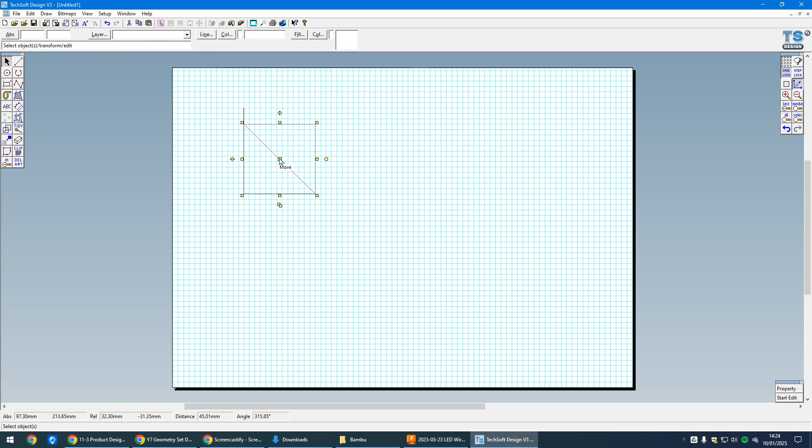You could start a new one, or continue working on the CAD file you used to make the ruler. I'm not going to use the line tool to draw this shape, because if I do a series of lines, they're classified as separate lines. That means I could move them all apart and separate them, which could be useful, but in our case I don't think it is.

Instead, I'm going to come to Tool B3, here in the top left of the screen. I'll hold the mouse button down and go to the fourth tool along, which is called the Open Polyline.

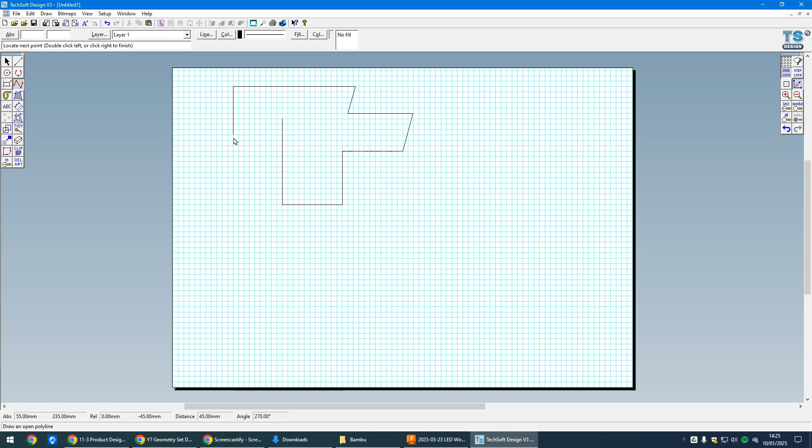What this allows me to do is simply draw a series of lines by left clicking, and then right click to finish. Okay, let's undo that—I don't want that.

There's something interesting happening here: as I'm drawing lines, you can see it's kind of snapping to various points on the grid, but not necessarily following the grid itself. That's because I've turned on a radial lock.

Now, if I turn the radial lock off for a second and draw some more lines, you'll see I can literally position exactly on the grid where I want those lines to be. But because I'm making this isosceles triangle, it might be useful to work with the radial lock on.

I'm going to right click on the radial lock tool up in the top right corner, Tool D3, and set the step angle to 45 degrees. I'll turn on 'only active on line drawing and marquee box rotation,' which is super important so it doesn't get in the way when doing other general things. So definitely turn that box on.

Now that means as I draw a line, it's going to snap to vertical, 45 degrees, or horizontal. That's going to make drawing my isosceles triangle that bit much easier.

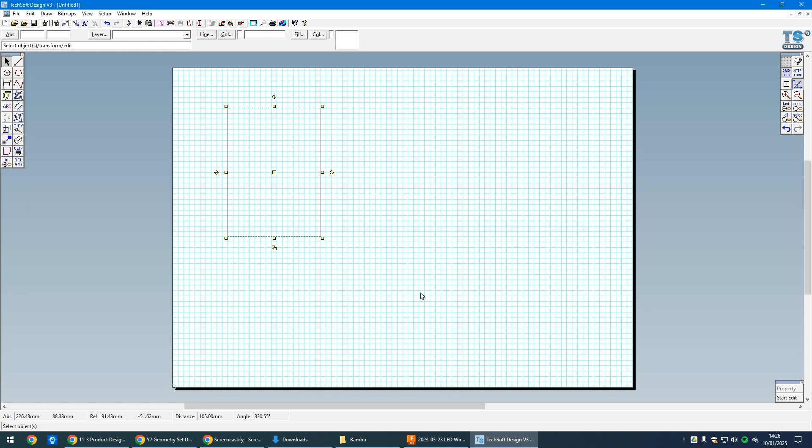Okay, I'm going to get the selection tool, put a bounding box over all these lines, and press the delete key on the keyboard. Okay, there you go—let's start to draw my set square now.

So remember, it wants to be 90 by 90. Okay, with my polyline tool, I'm going to click near the top, and now I'm going to come down 90 millimeters.

Now, as I did with my ruler, I'm going to look down here at the relative grid reference point, at the y value, which is to the right hand side of this rectangle. I want to see -90, and now I can see it says -90 in the relative grid reference in the y-axis.

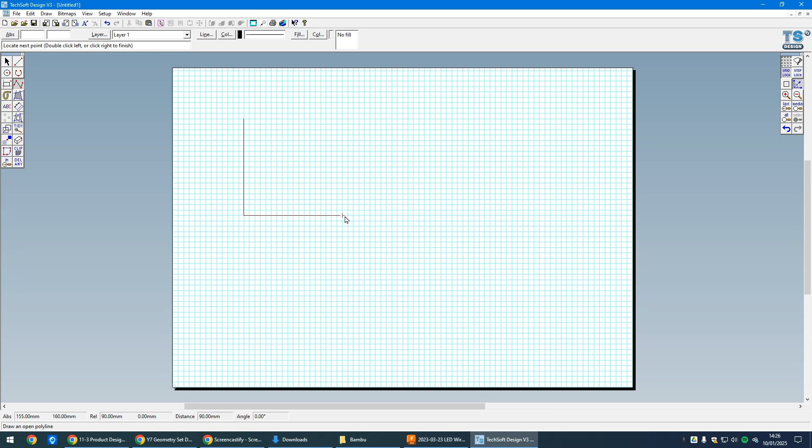I'm going to click, and then come to the right, and my x-axis wants to say 90 millimeters. Then I'm going to come back up to the left.

Because I've got radial lock turned on, look, it naturally gives me a 45-degree angle there, and then I click at the start of that isosceles triangle. Now I'm still drawing, so don't forget I've got to right click to finish that process. Let's make sure this is all working correctly.

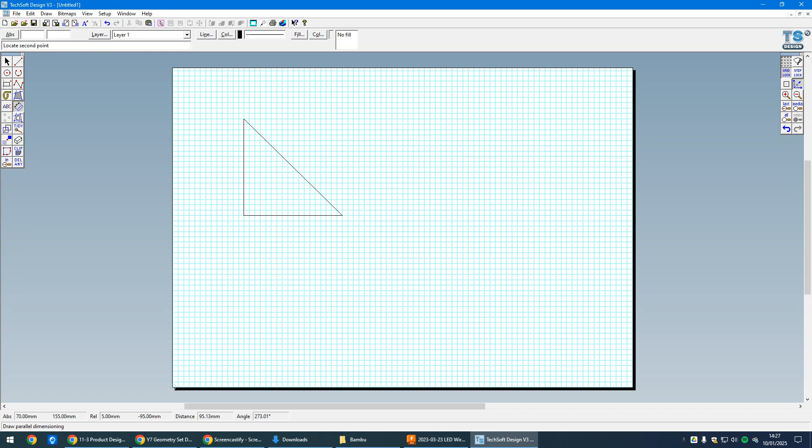I'm going to come down now to the dimension line tool in the top left, tool B5. I'll click at the top, click at the bottom here, and then click out to the side. I can see that's 90. Okay, let's click again for the bottom dimension. And then I'm also going to look here at the hypotenuse.

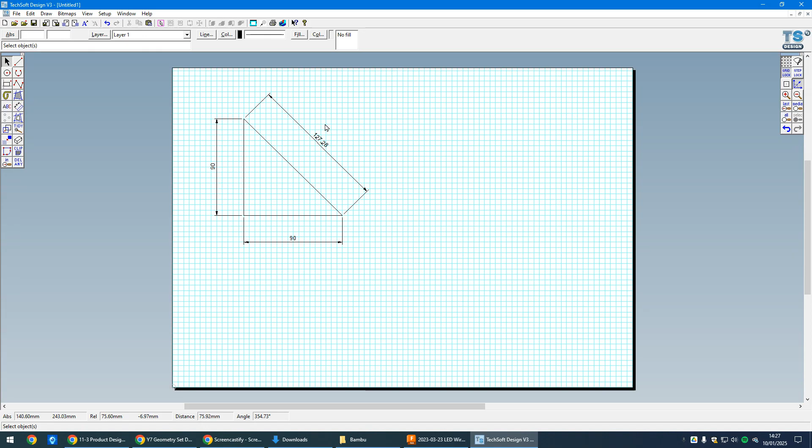Now, I don't really want to measure this hypotenuse, but it's going to be just fun to see what's happening. And I get this strange value here, 127.28. Where is this coming from? Well, you may know that there are rules for calculating the length of a hypotenuse with isosceles triangles, and this is the formula, or this is the symbol we're looking for: the square root of 2 multiplied by the length of one of the sides.

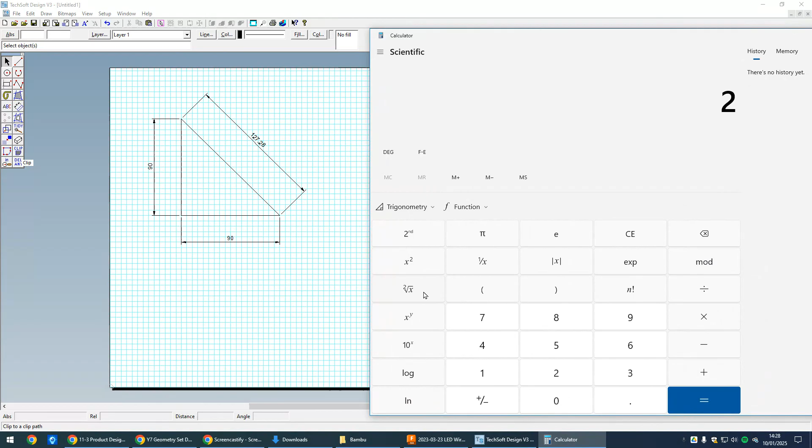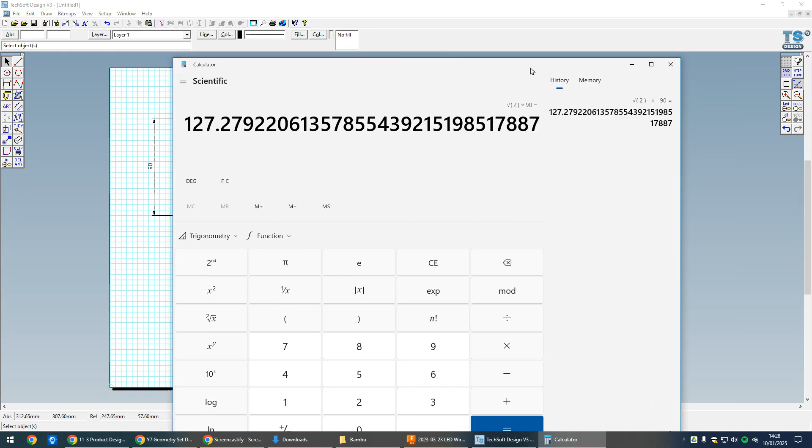So let's just bring up the calculator here and see what we can do with that. I know that I've got 2, I want the square root of 2, 1.414, and I'm going to multiply that by 90. And that gives me 127.28, because I round up here, 0.28 millimeters, and that's the dimension we have here. So that's the hypotenuse. Now, I'm not going to worry about that distance because I'm working with integers, and that's an odd decimal place, and it's been defined anyway by the fact that we've got 90 by 90 in the isosceles triangle with a right angle.

So I'm going to delete that. However, what I can do here is come back to the dimension line tool, come along here to the angular dimension tool, and now I can start to identify that that's going to be 90, this is going to be 45, and that is going to be 45 there as well. Now, that's getting a bit cluttered now.

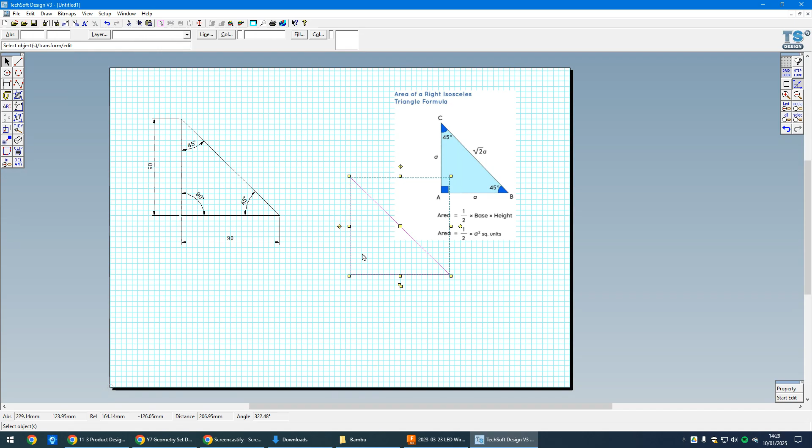So actually what I'm going to do at this point is select that triangle. Remember, I've still got gridlock turned on here. I'm going to copy that, paste it, and now work on this version of my set square. So that could be my model with all my dimensioning laid out.

And here's the version I'm actually going to start to work on. Now, one of the things I need to do is make sure I've got my centimeter and millimeter markings on here. The way I'm going to do that is by rotating this design through 45 degrees. My center of rotation is going to be the endpoint where the 0 mark is on the ruler. So if I click on my design here, I can see there's this little square, which is actually the midpoint of the hypotenuse.

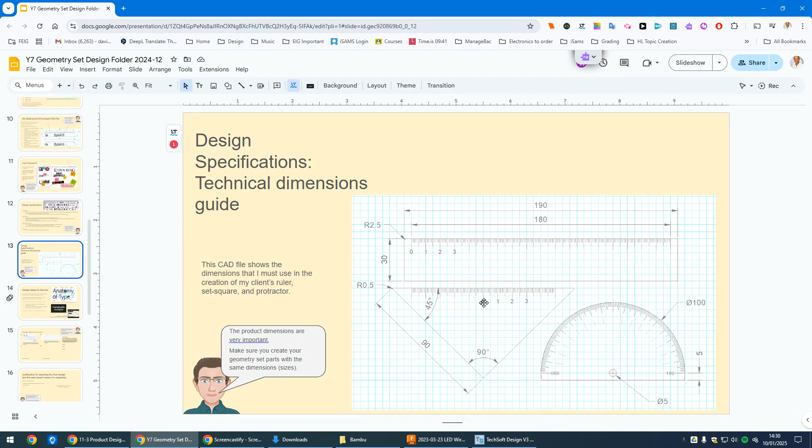And because I've got a radial lock turned on at 45 degrees, I can now click on this rotate tool, rotate it through 45 degrees, click again, and now I've got my set square in this new orientation, which is going to allow me to take my millimeter and centimeter markings from my ruler, copy them, and paste them into this design. All I need to do then is change it, so rather than being from 0 to 18, it's going from -5 to +5, with 0 being the point which is the center of the hypotenuse and which aligns with the right angle of the isosceles triangle.

And that will then be ready for me to add my graphics and my client's custom font, and then send to the laser cutter. This video is going to stop now.

I'm not going to go any further with these instructions. You know how to make the ruler, you could copy it. So you know how to make the millimeter and centimeter markings and the numbers. You could take it from your ruler and modify it. You know how to work with graphics. You know as well how to add the color codes for our laser cutter to be able to interpret your CAD file so it knows what to cut and what to engrave.

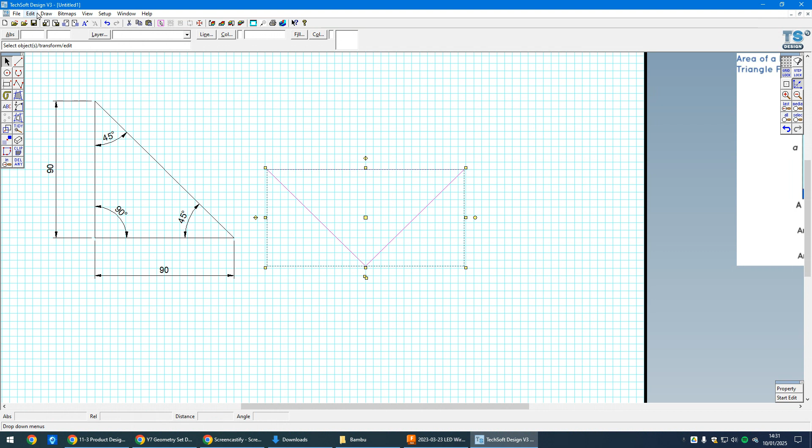The last thing I'll say here is don't forget, when your set square is finished, select it all and then group it all together so that the things aren't separated and it's easy to manipulate when we send it to be laser cut. Okay, good luck with that.